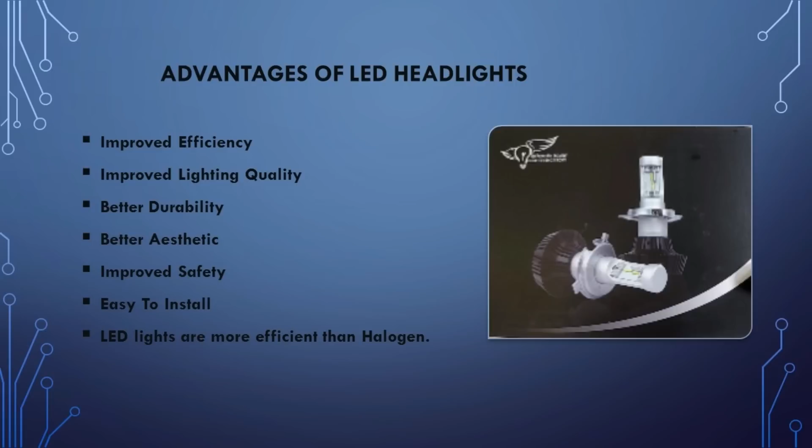These LED headlight bulbs will fit the Honda Goldwing GL1800 as well as the F6B from year 2001 through 2017. I will include a link in the description below if any of you are interested in purchasing these H7 LED headlight bulbs from Electrical Connection.

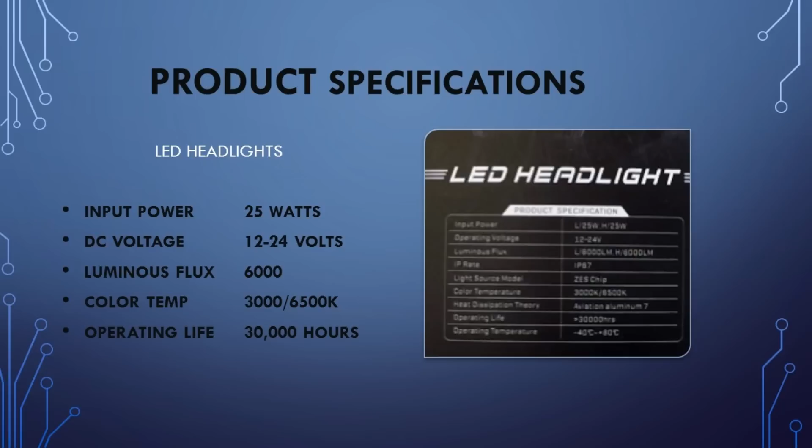It shows an input power of 25 watts, operating voltage between 12 and 24 volts, luminous flux 6,000 lumens, color temperature 6500K, heat dissipation aviation aluminum, operating life 30,000 hours, and an operating temperature between negative 40 and 80 degrees Celsius.

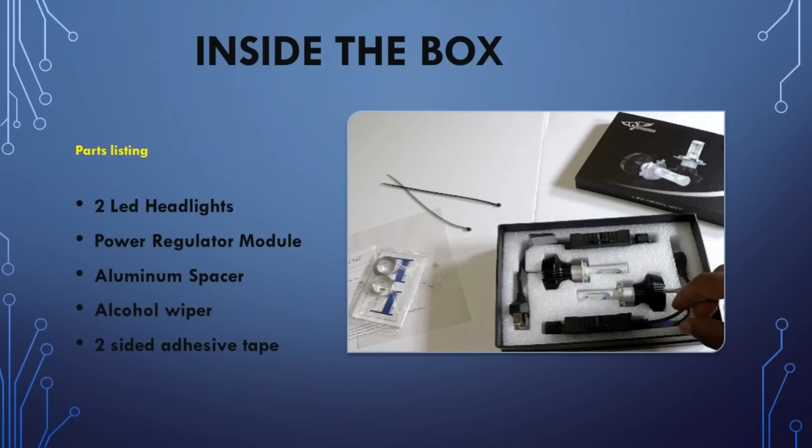Looking inside of the box, it comes with 2 LED headlights, 2 power regulator modules, 2 aluminum spacers, 2 alcohol wipes, 2-sided adhesive tape, and zip ties. I will show you how to assemble the headlight kit before we install it on the Honda Goldwing.

This is the power regulator module. It's very simple. One end plugs into the Goldwing, and the other end plugs into the H7 light.

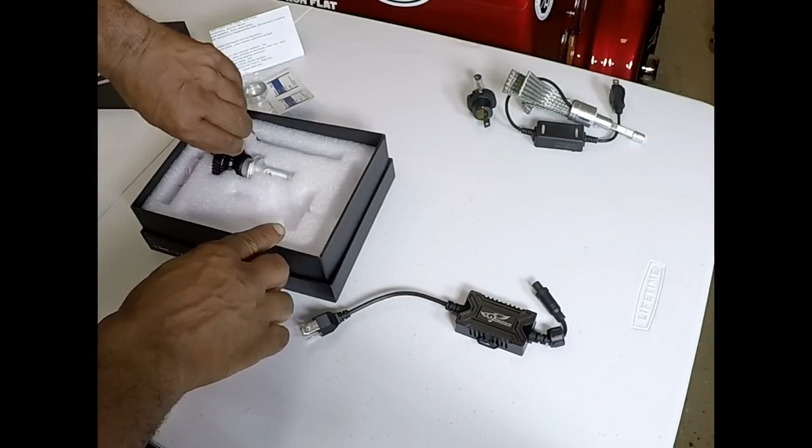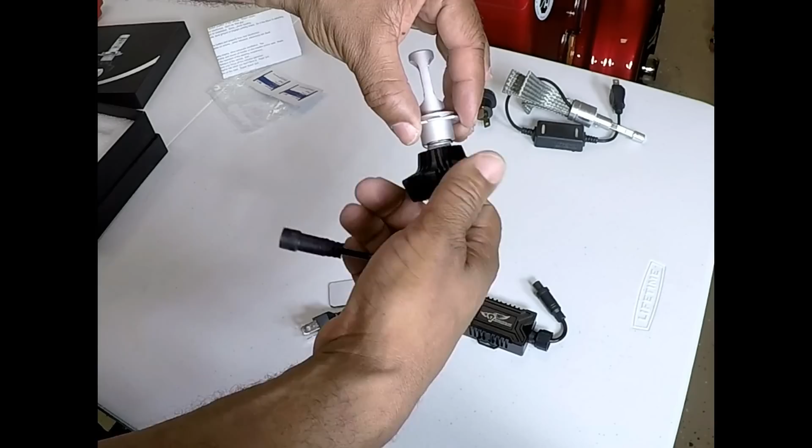The first thing you want to do is remove the heatsink located on the back of the H7 light so you can install the aluminum spacer. You can take a rag to help hold it and unscrew the black heatsink located on the rear. You want to unscrew it in a counterclockwise rotation, then remove that heatsink off the back.

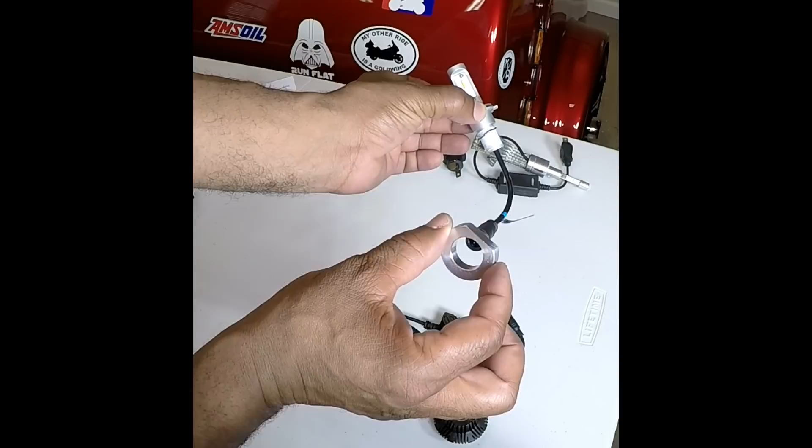The next thing you want to do is add the aluminum spacer. If you look at the aluminum spacer, it has a flat corner at the top. You want to put that in a 12 o'clock position.

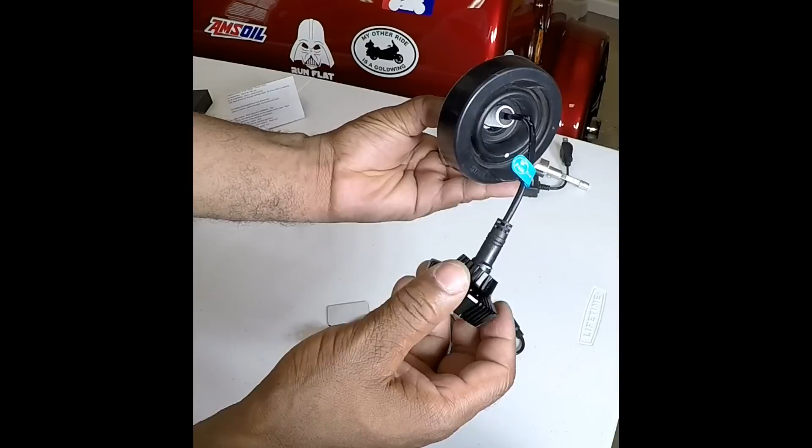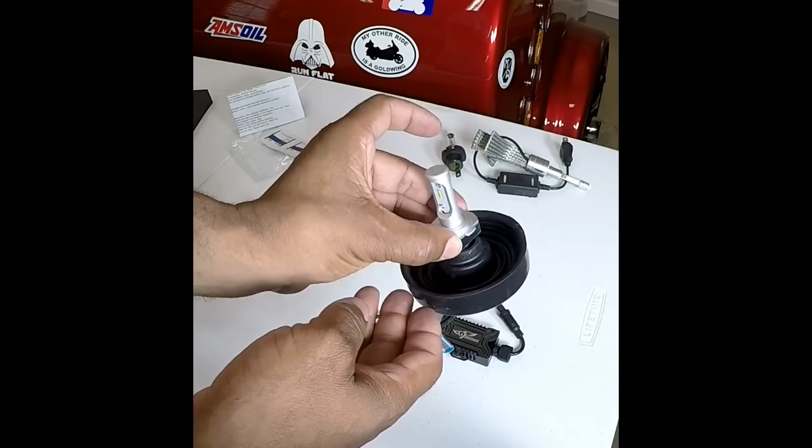Next, you want to slide on the rubber boot dust cover. Once you get that boot cover on, now you can come back and tighten it down with the black heatsink, in a clockwise rotation. You just want to get it hand tight - you don't want to torque it down too tight.

Next, you will plug the power module into the H7 light. It has a little notch there, so there's only one way to plug it in. You want to plug that power module one end into the H7 light, and the other end into the Honda Goldwing.

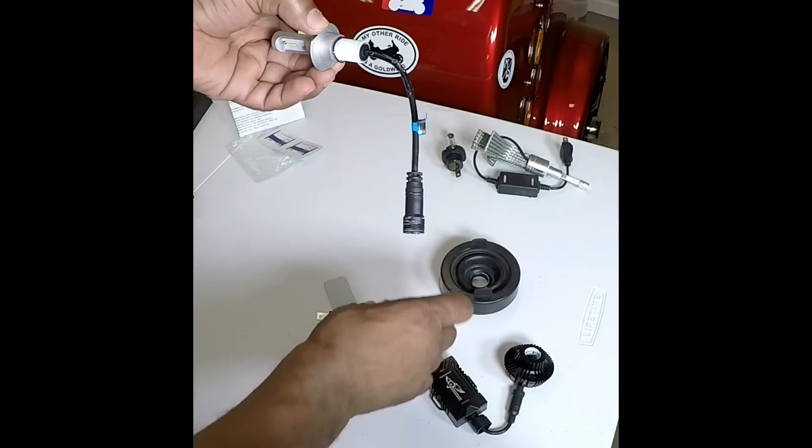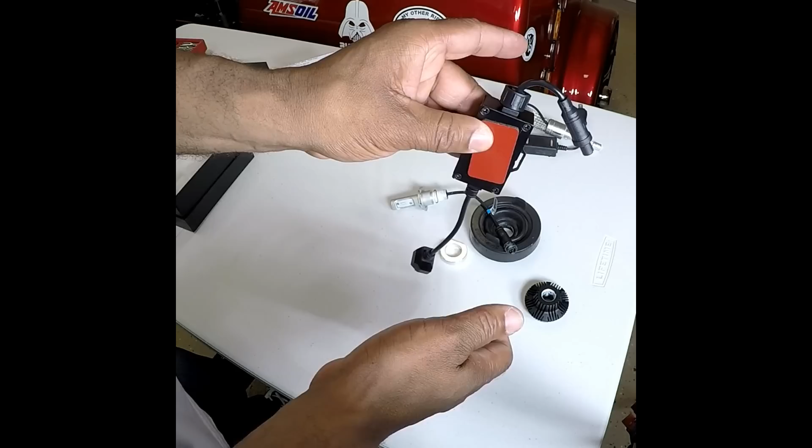Once you have the power module installed and plugged in, you can now secure it to the side of the Honda Goldwing. You can use the optional 2-sided provided tape, or you could actually use zip ties. That's one thing I do like about this product - they made it so you can put zip ties through the power module and mount it to the side of the Goldwing, making installation so much easier.

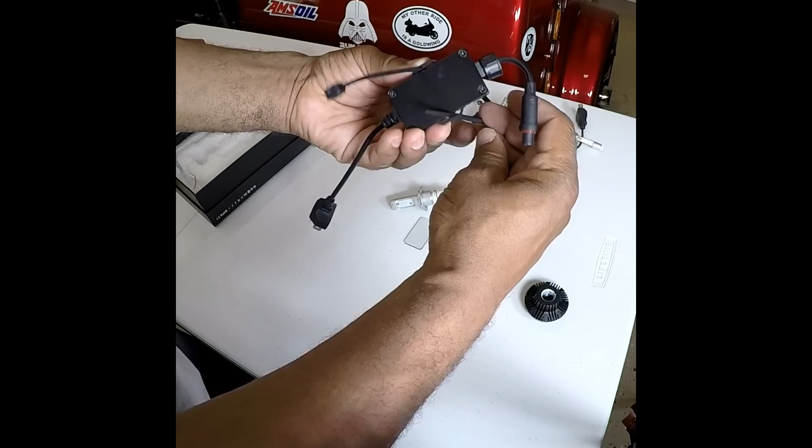The first thing I need to do is remove the front meter panel. To do this, I will sit on the Goldwing and reach up around the ignition switch and lift up on the front meter panel.

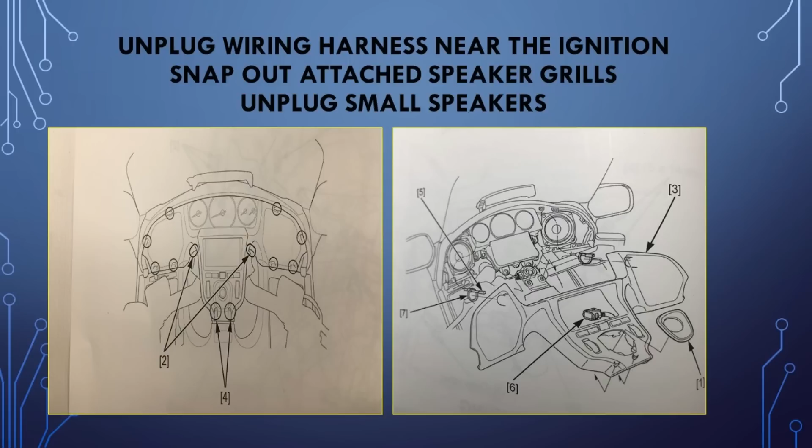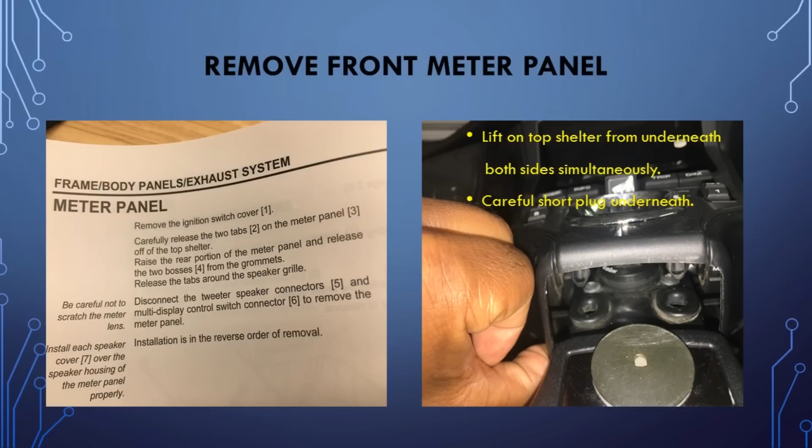Underneath is 2 rubber grommets. All you need to do is just lift up on the top shelter to release the male bosses out of the rubber grommets. But be very careful, because underneath the meter panel is a multi-display control switch connector, and you want to get that switch disconnected before you lift it all the way up.

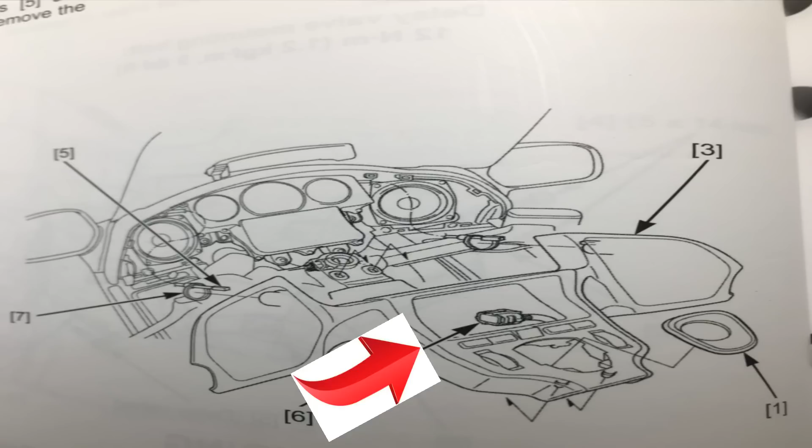So once you snap it out of the grommets, the next thing you need to do would be to reach around to the front of the meter panel underneath and release the control switch connector. To release the connector, it was easier for me to take a small flat screwdriver, reach in and open the tab. From there, I was able to pull the connector loose.

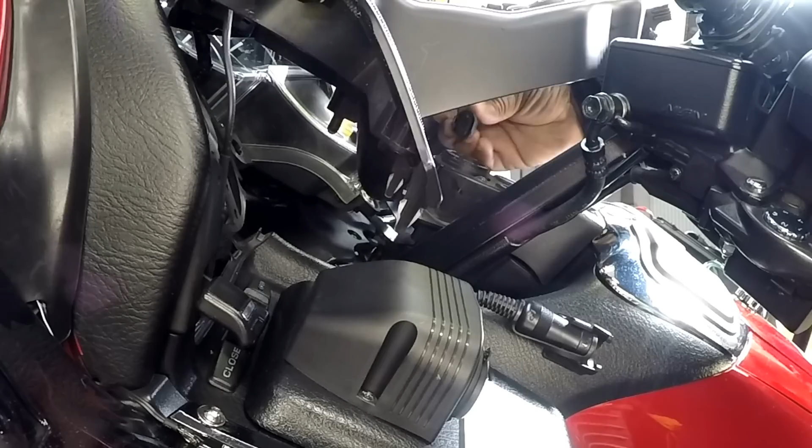The next challenge will be unplugging the small tweeters on the right and left side of the speaker grill.

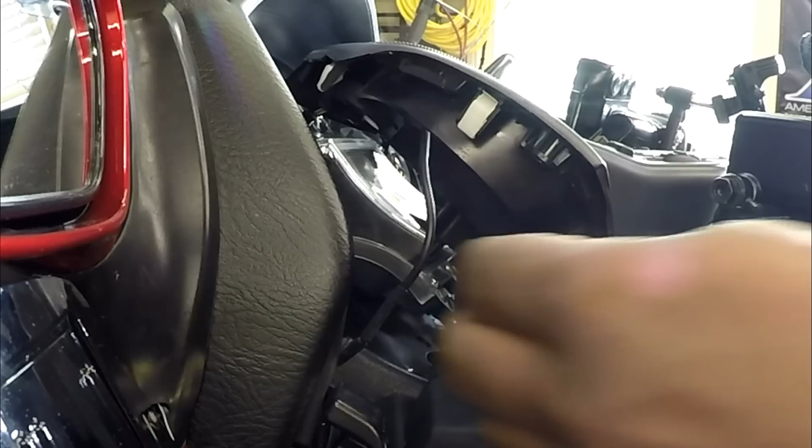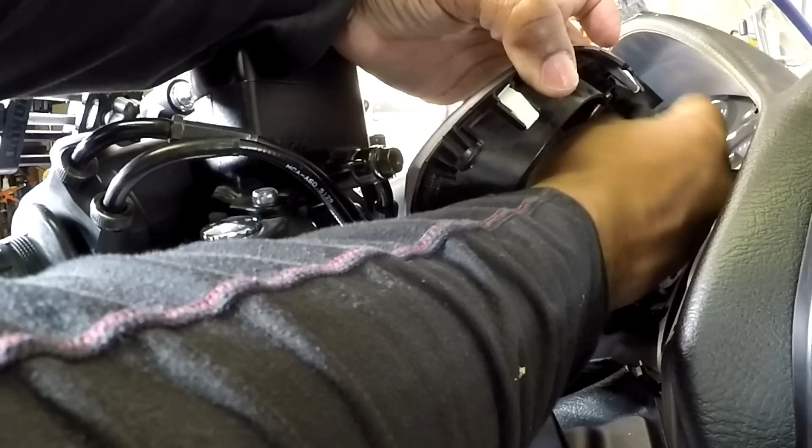Once you snap the speaker grill out from the Gold Wing, you need to release the tabs on the tweeters. To do this, remove the round rubber cover on the back of the speaker, reach in, and push on the tab. It helps to use a small instrument with a hook, because the tab position depends on which side you're standing on: 3 o'clock from the left, 9 o'clock from the right. It's kind of hidden, so you have to reach from the opposite side and apply pressure to release it.

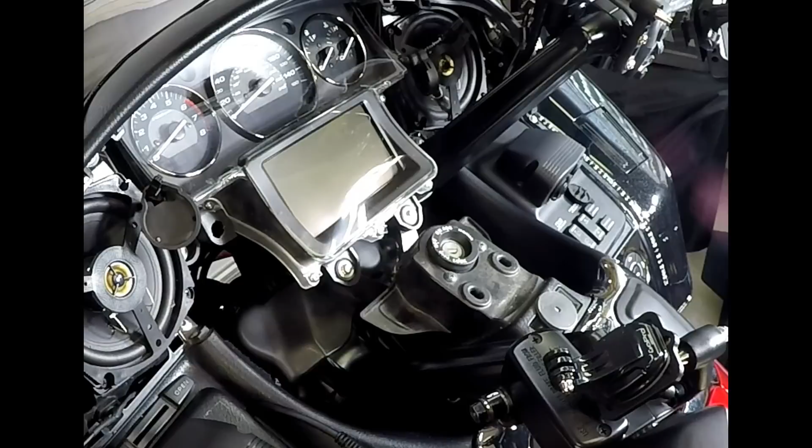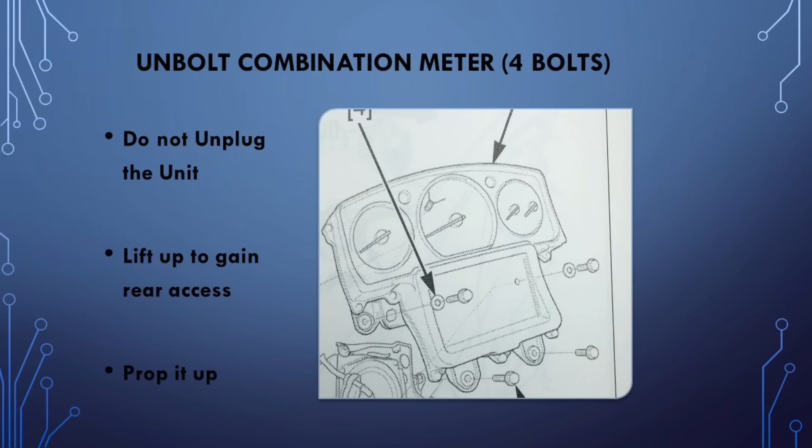The next step is to unbolt the combination meter, or instrument cluster. You only need to remove 4 screws to do this. You don't want to unplug it from the Gold Wing, just remove the screws and lift up on it once unbolted. You don't have to unplug it, just lift it up so you can prop it up and get behind it.

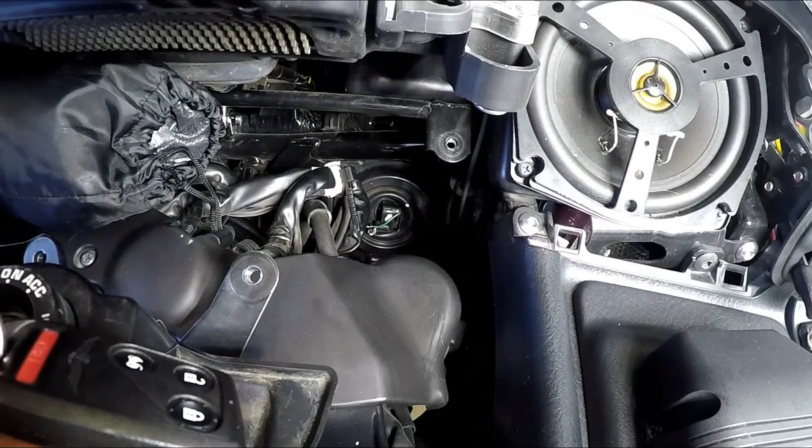On the front of the Gold Wing, space is very limited and tight, so it's hard getting your hands down in there. A lot of this will be a one-handed operation.

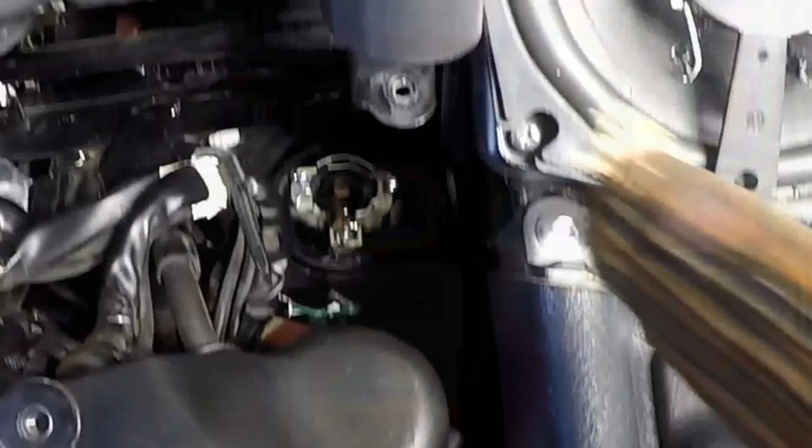The first thing you need to do is remove the existing headlight. Start by unplugging the wiring harness on the back of the headlight and get it disconnected. Remove the rubber round boot cover. Next, unhook the bulb retainer clip by pushing in and then dropping it down. Once you push in and down, you can release the retaining clip, swing it out of the way, and remove the bulb.

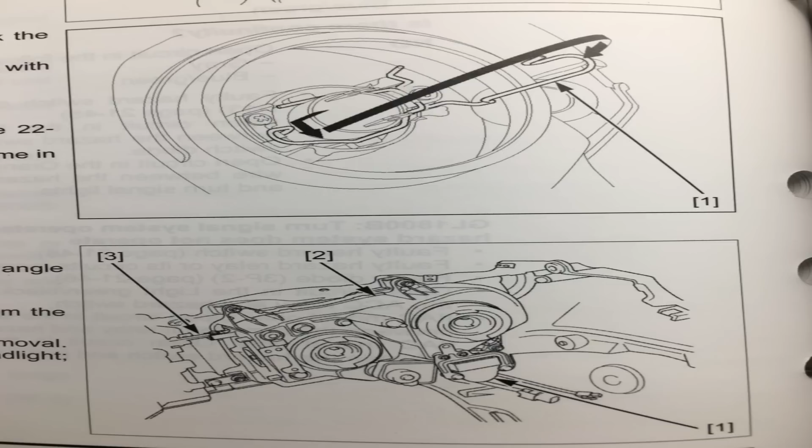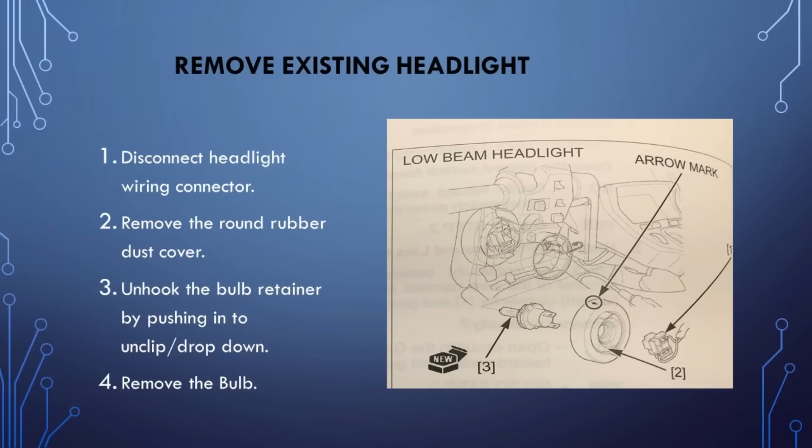Working on the Honda Gold Wing is very tight, with no room to work, so it's hard to get a camera down there for you guys to see. But hopefully by now you know how to remove a headlight: disconnect the connector, remove the rubber boot, unlatch the retaining clip by pushing in and down, and remove the H7 bulb. The first thing I need to do now is take the LED bulb.

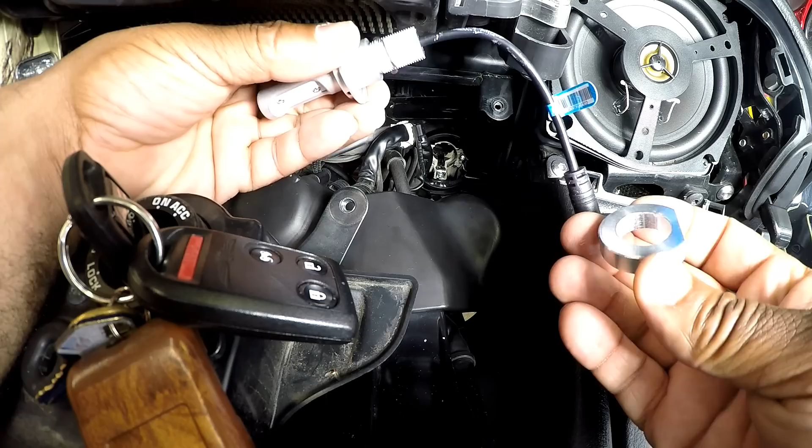Be careful not to lose the retaining clip on the back. I want to go ahead and slide on the aluminum spacer, putting the flat part in the 12 o'clock position. Be careful not to lose the little retaining ring on the back, because this is what holds pressure to keep the headlight tight.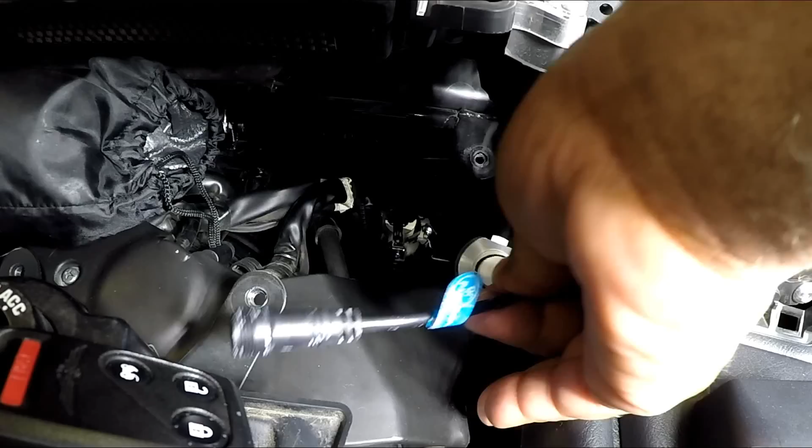I want to install the headlight bulb in the 12 o'clock position. I know it's hard to see, there's no room to work, barely space to get your hand in there. It's real tight.

A lot of this has to be done by feel, and hopefully by now you know how to install a bulb. Once you get that H7 bulb inside the housing, next you need to take the retaining clip and lock it in place.

To do this, I'm going to take a piece of wood, hopefully you guys can see exactly what I'm doing. I'll reach in with the piece of wood, push in on the retaining clip, and lift up to lock it in place. I know it's hard to see, but working on the Gold Wing again is very limited space.

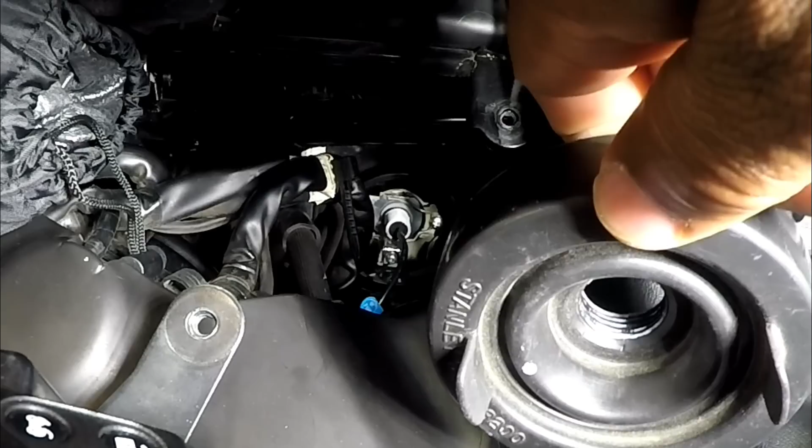I need to get the rubber boot installed. I'm going to reach in with one hand, since it's so tight you can only get one hand in here, and feed the wire through the rubber boot. I'll install the rubber dust boot cover back on with the arrow marks facing up.

Next, I'm going to install the heat sink, which is what tightens it into the housing on the Gold Wing. With one hand, I'll reach in and feed the wire through the heat sink, then tighten it in a clockwise rotation, only hand tight.

I just want to feed it on there. Once it starts tightening, I'm going to stop. Just want to get it hand tightened.

Now that I have installed the heat sink, the next thing I'm going to do is attach the power module. You want to make sure that the notches are aligned - there's only one way to plug it in. Once you get it snapped in, you can go ahead and tighten it down, just hand tighten it.

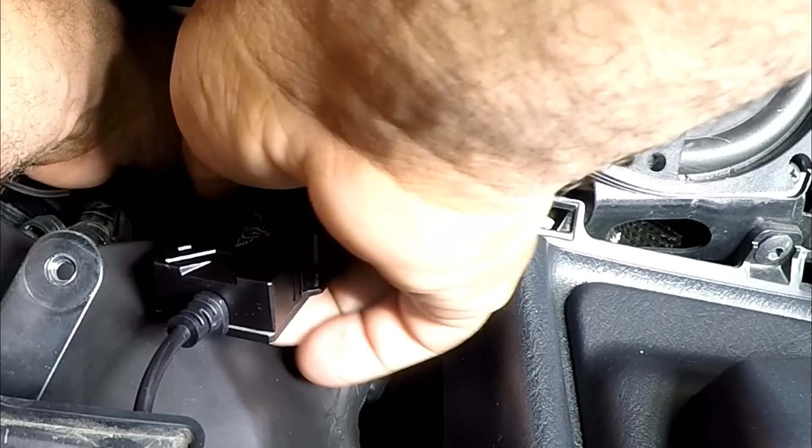In this portion of the video, I secured the power module to the side of the Gold Wing by making a small hole. I took a flame and heated up a screwdriver to make a small hole where I could run the zip tie. The Gold Wing has absolutely nowhere to mount a zip tie, so I took this hot screwdriver and just made a hole big enough to run a zip tie through, so I can secure the power module to the side of the Gold Wing.

I can use the optional two-sided tape, but with all of the heat coming from the engine, I'm not sure if that two-side tape will hold. The zip ties would be more permanent.

That's one thing I do like about Electrical Connection - they did put a lot of thought into their headlights, giving you the option to do two-sided tape or a zip tie. I do prefer zip tie because it's more permanent.

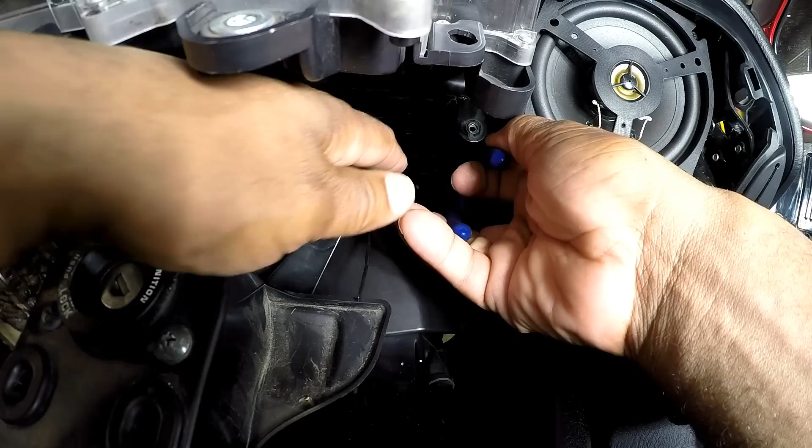Once I tighten it down, I just took a pair of small wire cutters to reach in and cut the zip tie. Next, I need to plug up the 2-prong connector from the power module to the 2-prong female of the Honda Gold Wing headlight connector.

If the connector is loose when you plug it in, unplug it and spread the metal blades or prongs open a little bit, then plug it back in. That should make the plug connector tighter. Repeat the steps if it's still loose.

On the opposite side, you're going to take the exact same steps that you took to disassemble the headlight. You're going to take the same steps to reassemble the headlights. The steps are the same for the low beam side on both sides, so it doesn't matter if you started on the right or the left - the installation process will be the same.

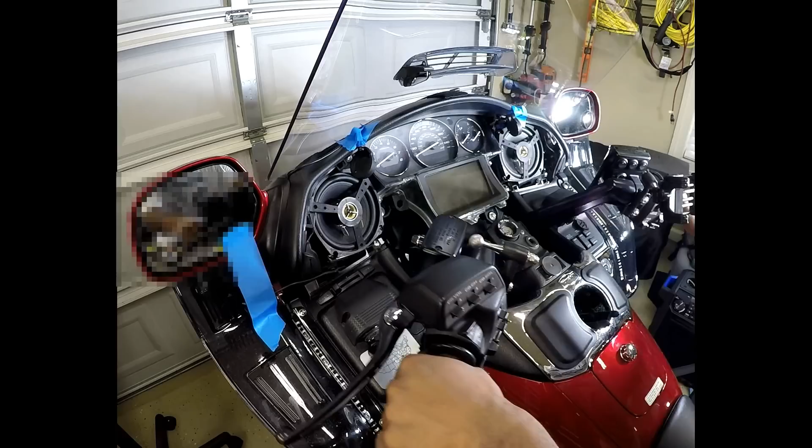Once you have replaced the right and left low beam on the Honda Gold Wing, you want to turn on the ignition switch to verify that the headlights are connected. You want to replace the meter panel shelter, reconnect the tweeter speakers, and reconnect the multi-display control switch connector in the reverse order of removal.

My phone always rings every time I make a video.

Electrical Connection H7 headlight installation was easy by comparison to other LED headlights that I've installed in the past. The shipping was fast, the price is good, and a lot of thought went into the headlight design, making the installation easier in tight quarters. The toughest part of the job is getting my hands into tight spaces on the Honda Gold Wing GL 1800. The lights are very bright.